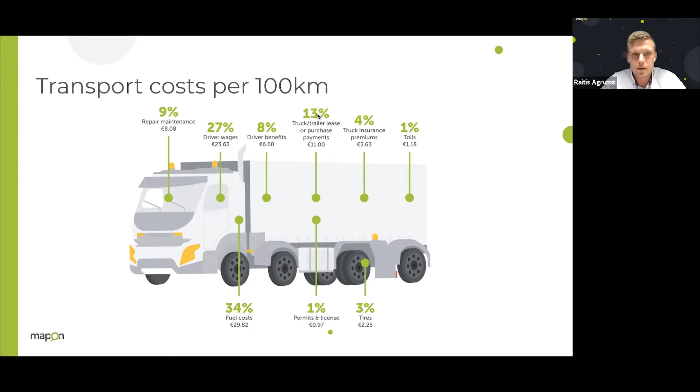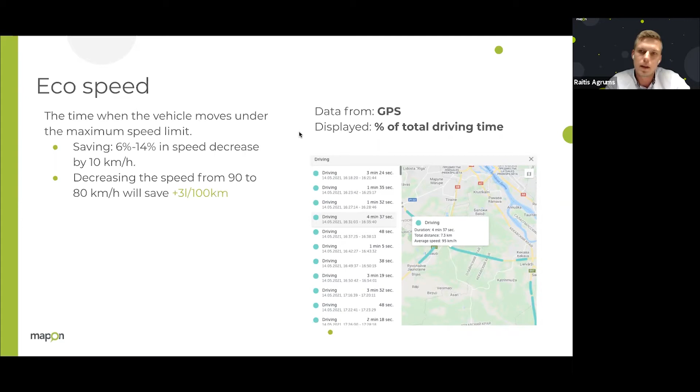The speed is measured from GPS data and displayed as a percentage of total driving time. So here we are calculating the maximum speed for the vehicle and displaying it as a percentage of total driving time.

Next parameter which we are measuring is excessive idling. Excessive idling is a time when the vehicle is idling more than a specific time, and is displayed also as a percentage of the total driving time.

Idling data are mostly taken from the ignition. For Mapon devices, idling can also be set from RPM, which gives higher accuracy. From the RPM range, we can tell if the vehicle is doing real idling instead of just ignition. For example, RPM tells us if the engine is turned on or off, because ignition can only tell if ignition is on, but not whether the engine is started. You can turn on the ignition, but not start the engine.

Recently, in addition to excessive idling, we have added a PTO, or power takeoff, switch. This means that if the vehicle is standing with the engine on, but the PTO is also on, then it will not be counted as excessive idling.

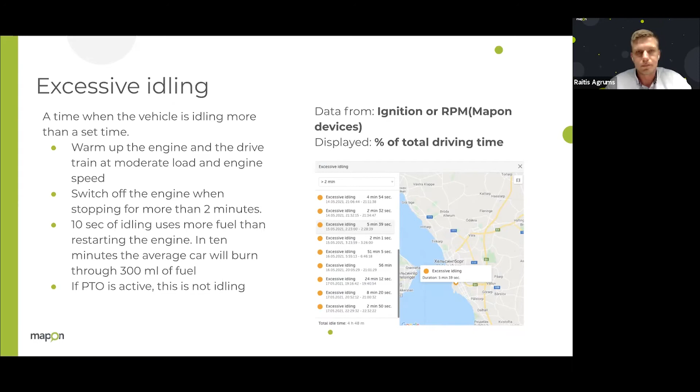Okay, let's move to the next - cruise control usage. We also measure cruise control in driving behavior, and cruise control is a great way to decrease fuel consumption since it smoothens the drive and is more protective of the engine. Cruise control can give savings of up to 7% of fuel on highways.

Pure cruise control usage is available mostly for trucks with CAN connection, and it could be obtained from Teltonika and from Mapon devices. Cruise control is also displayed as a percentage of total driving time. So if you drive 100 minutes and cruise control usage is 10 minutes, then cruise control will be 10%.

Why do we measure cruise control? Because when the driver drives with cruise control, it doesn't make movements in the pedal, since cruise control keeps the speed steady. If the speed is not steady, it's like driving without cruise control - your pedal is moving a little bit, but it's moving, and that increases fuel consumption. It's very important.

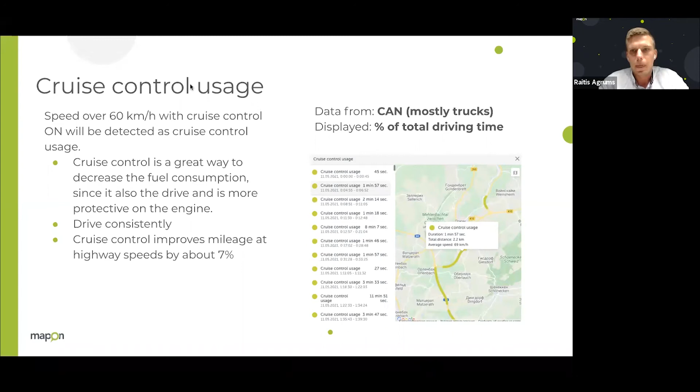Okay, let's go next. Coasting - I think this is one of the most important parameters in the way to decrease fuel consumption. This parameter measures how efficient the driver is, whether he's using the inertia of the vehicle, and how well the driver can predict the traffic.

Coasting is detected by checking multiple vehicle parameters at one time. So to detect coasting, the vehicle should move 5 seconds with cruise control off, accelerator pedal off, brake pedal off, and speed should be over 10 kilometers per hour. Then we tell that the driver is coasting and he is using the vehicle inertia.

For example, the weight of a fully loaded truck is around 40 tons, and the power of inertia is so strong that the car can drive along a distance with zero consumption. Imagine a 40-ton trailer moving on the road - this trailer's inertia is so big that it can move without acceleration for a long distance and without losing speed.

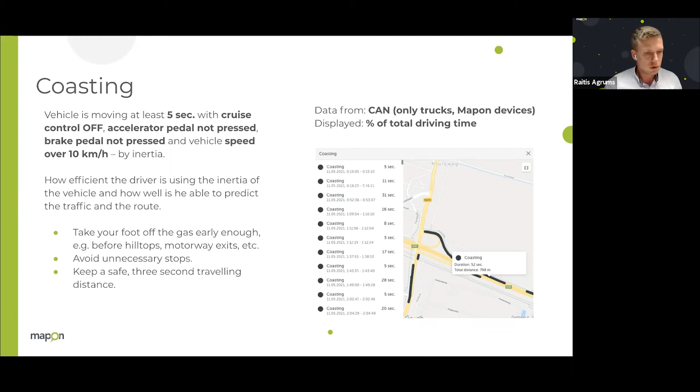Yes, and... yeah, and just a moment. Yeah, okay, let's move next.

One of the last parameters which we are also measuring is harsh braking, acceleration, and cornering. These parameters will not only find uneconomical drivers, but will also help find risky drivers, which can lead to accidents and higher insurance costs. A sharp increase and decrease in speed will be detected as harsh braking or acceleration.

Acceleration and braking are calculated from CAN, and secondarily from GPS data. So if the device has the possibility to read CAN data, CAN speed, then we use CAN speed to detect acceleration. If not, then we use GPS data. CAN is preferred because it's more accurate.

Acceleration and braking calculated from CAN are calculated in G-force. If we convert the G-force to kilometers per hour, it's around 10.9 kilometers per hour in 1 second - that increase will be detected as acceleration force.

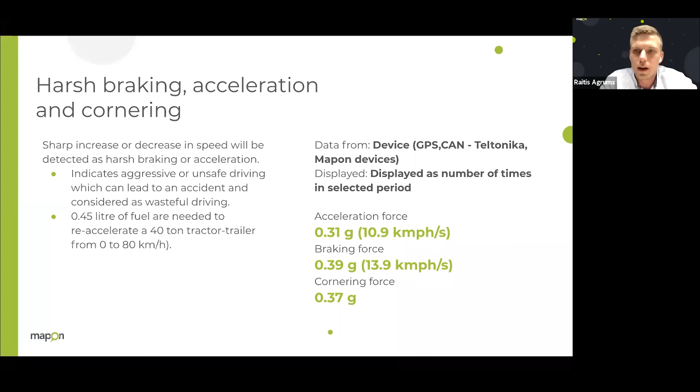Also, a good example for acceleration and braking is that if we stop the car or truck unnecessarily and want to accelerate this 40-ton truck from 0 to 80, it will cost us almost 0.5 liters to accelerate. So it means that half a liter is spent when we want to accelerate the truck from 0 to 80 kilometers per hour.

The last parameter which we measure is driving green RPM. The economical, operational range for diesel engines is around 50 to 60% of the nominal engine speed, which is approximately 70 to 90% of the acceleration pedal.

So basically, if we accelerate the car and press the pedal till the end, till 100%, then it will definitely be an uneconomical drive. The green RPM is something which is also seen in the truck tachometer.

If we get in the truck, we can see that in the RPM gauge there is a green field, and the driver should keep the RPM in this green field, which means the driver will do the most economical acceleration.

This is also one of the most important parameters for having good fuel consumption. RPM we can get from CAN, and currently it's supported for Teltonika and Mapon devices.

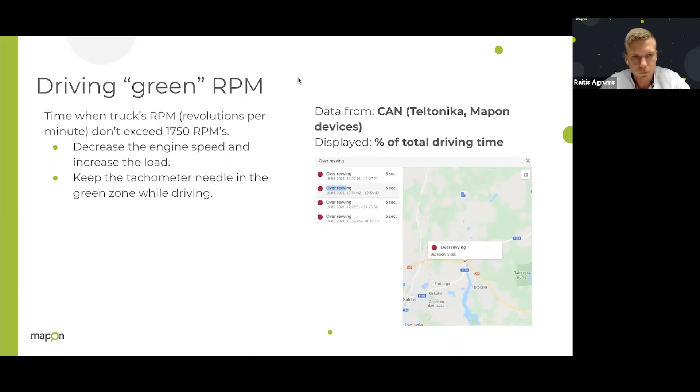Okay, let's go to the calculation table.

Each driving parameter has a grade from A to G, and the grades are assumptions that are based on tests with clients and research.

There is no single system in the globe to determine how much cruise control usage is considered good, and how much braking force or braking times are considered bad. That's why products like driving behavior could not be compared with other company products. For example, if I said I braked 5 times last week, is it good or bad? Should I be C or A? It's an assumption based on research and based on another research.

That's why clients who have two types of trucks, Mercedes and Volvo, have two different driving behavior management systems. It's not good to evaluate drivers in one table - these are two separate products. Of course the trends will be similar, but the data will not be the same as another system.

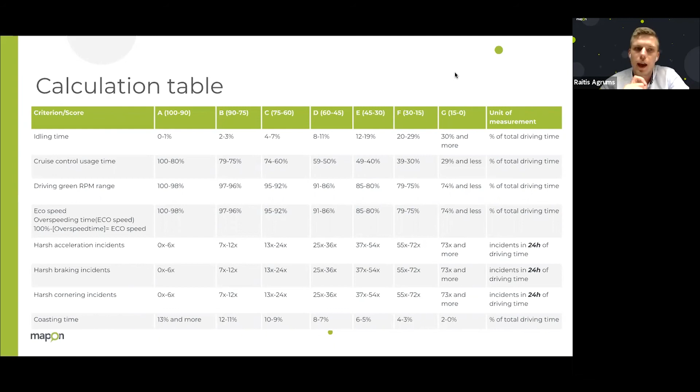The only three parameters which are not calculated based on driving time are acceleration, braking, and cornering, because these are events which don't have a time interval - basically you have a harsh braking, and that's it. That's an event. So these events are calculated based on incidents, based on number.

So we have an assumption that if in 24 hours of driving you have acceleration, for example, 7 times, you will get B. But if you drive not 24 hours but only 12 hours, then with seven brakings you will probably have just C, not B.

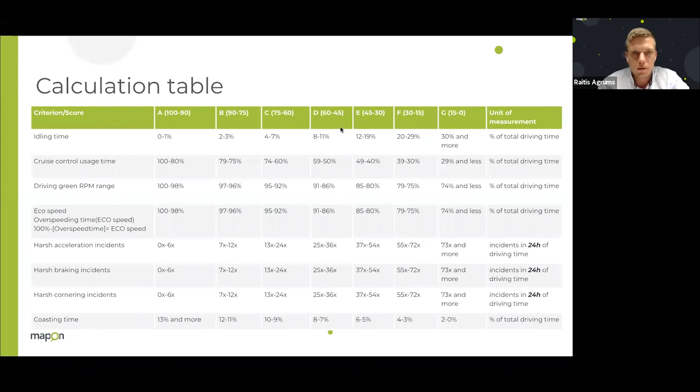Let's move next. I wanted to share a solution we recently added for driving behavior: different weights for each parameter. This means you can set your own weight for each parameter. For example, some companies think eco speed is more important than braking, so in the system you can find settings where you can set these weights. The bigger the weight, the bigger the importance of the parameter, and this gives clients very good customization for the driving behavior.

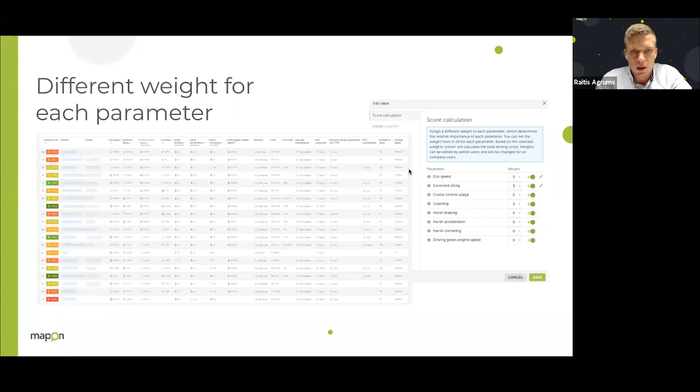Let's move on to the case studies. The first case study I wanted to share is Grace. Grace is one of our longest, oldest customers, and driving behavior was built together with Grace.

Grace is pretty huge - they have a lot of drivers, and fuel economy is very important for them because it takes the biggest part of all the costs. For drivers, they even have a driving school.

If a driver's fuel consumption is more than 33 liters per 100 kilometers, they send this driver to the driving school, and the driver learns how to drive. I was also sitting in the car with this driver to see how they were teaching the drivers.

The interesting part was that when the driver gets in the car, he shows how he drives - they make a test drive of about 40 minutes, and the driver shows how he drives and how much fuel he can save. When they finish the first test drive, the teacher shows this driver how to drive, and then they make the same distance a second time.

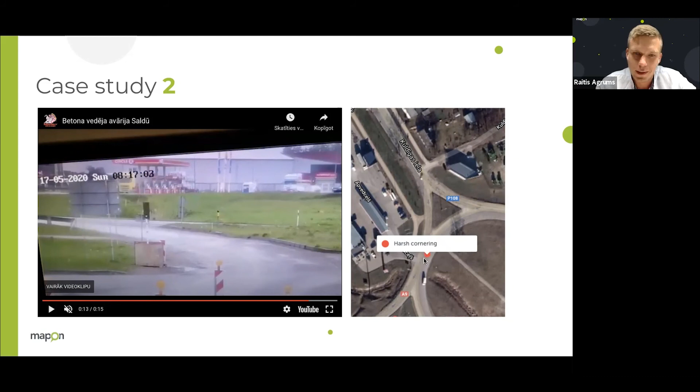I also looked at the historical data for this driver, and you can see it's harsh cornering here, and in the video you can also see the driver was driving too fast on this road. This client uses driving behavior data to improve driving safety and decrease fuel consumption, and he's very happy with this solution. So it really helps for them.

Okay, let's move to the next one.

I'll hand it over to Ingus. I'll take it from here to share the third case study, which is a bit more optimistic than the previous one with the car crash. The third case that is interesting for us is Bertschi.

Bertschi is a European company which transports chemicals with trucks, trains, and ships. Currently they have something like 1,100 trucks, which means they have a lot of operations.

Due to the fact that they're transporting chemicals, it's very important for them to manage safety, and they have internal guidelines on all the things drivers have to do in terms of safety checklists and similar things, in order to avoid any crashes.

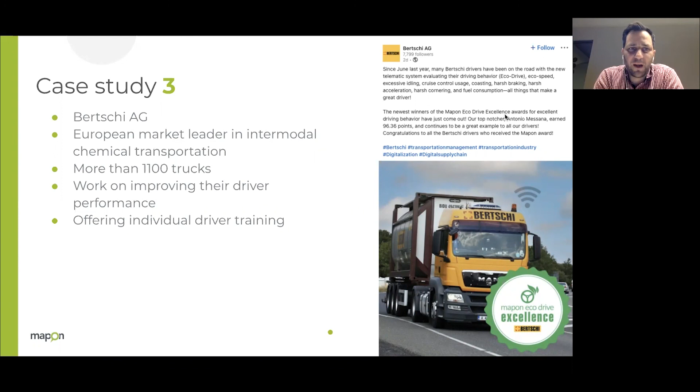I think this last case is a good example of how you can actually get additional marketing exposure for the services you provide, and this also gives you leads to continue the sales process.